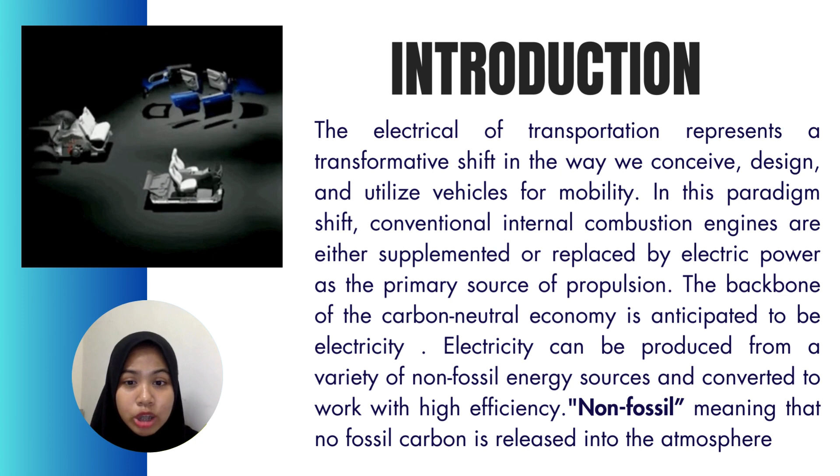The backbone of a carbon-neutral economy is expected to be electricity. It can be generated from a non-fossil energy source, contributing to sustainability by ensuring no fossil carbon is released to the atmosphere. Throughout this presentation, we will dive into the concept, advancement, and implication of electrical transportation.

It goes beyond just being a mode of transportation. It also signifies an innovative and sustainable approach to shaping the future of our mobility.

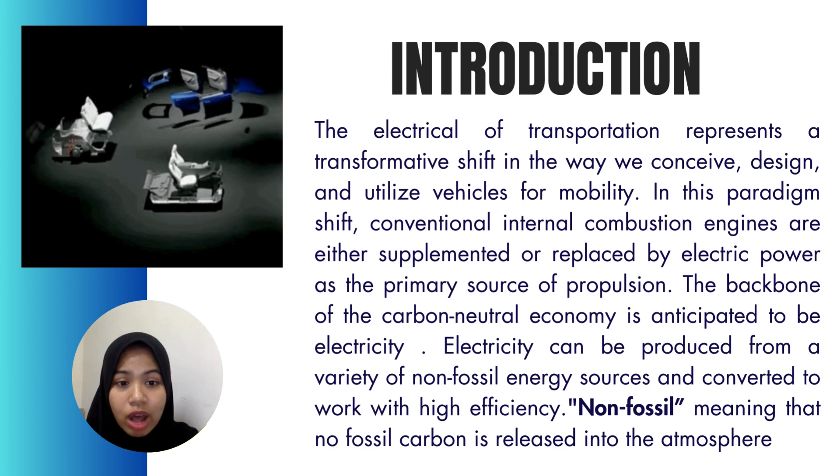Next, we will talk about the significance of electrical transportation. The first one is energy independence and security. It can reduce our dependence on limited fossil fuels by using electricity from a variety of sources, including renewable energy sources. By diversifying our energy source, it can reduce geopolitical risk and foster a more resilient and sustainable energy future that can improve energy security.

The second one is technological advancement. Advancement in charging infrastructure have made it easier for electrical vehicle owners to charge at home or at public charging stations, cancelling the need to head to the petrol station.

The last but not least, it's also good for urban planning and quality of life. In our urban environment, the significance of electric transportation becomes evident in the realm of urban planning and quality of life. Electric vehicles contribute to creating cleaner, quieter cities with reduced noise pollution and improved air quality because electric motors generate less vibration and noise. Sustainable and livable cities can be achieved through that.

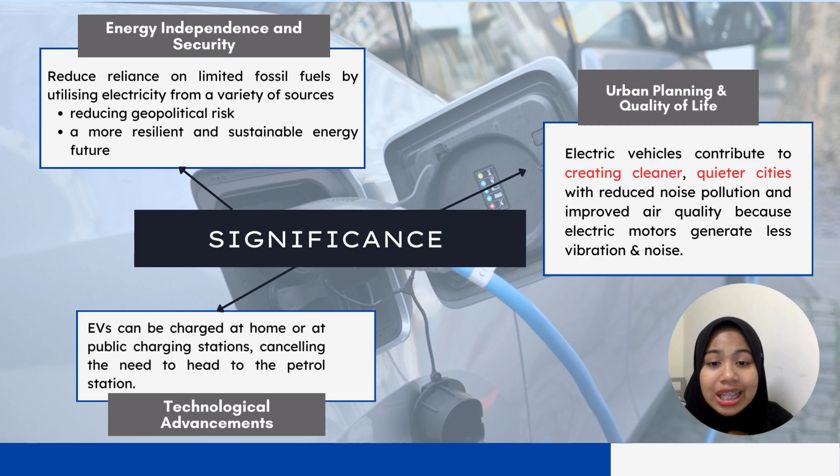Hi, my name is Nureen. So next is the potential benefit and challenges of electrical transportation. The benefit of electrical transportation is first, reduce greenhouse gas emission.

Electrical vehicles produce zero tailpipe emission, which can help reduce the overall carbon footprint of transportation and mitigate climate change. Second, is higher energy efficiency. Electrical vehicles are generally more energy efficient than internal combustion engine vehicles, as they convert a larger portion of the energy from their power source into forward motion.

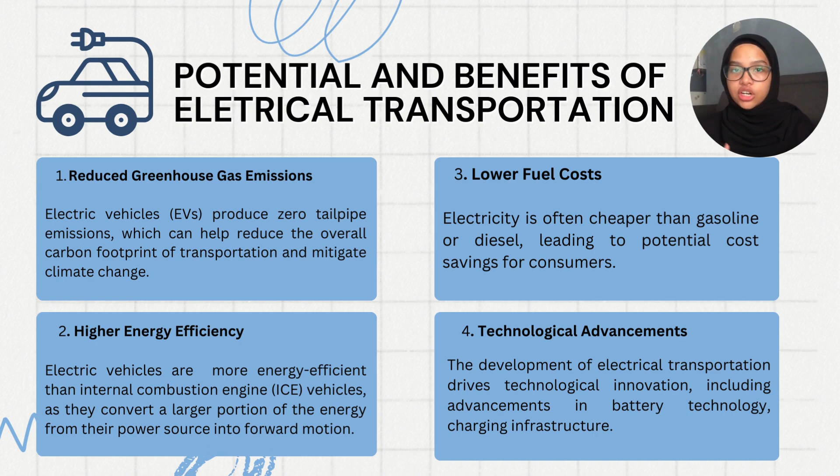Third, lower fuel costs. Electricity is often cheaper than gasoline or diesel, leading to potential cost saving for consumers. Fourth, technological advancements, which is the development of electrical transportation drives technological innovation, including advancements in battery technology, charging infrastructure, and smart grid technologies.

Next is the challenges of electrical transportation, or the disadvantages. First is the charging time. Charging an electric vehicle can take significantly longer than refueling a conventional vehicle with gasoline or diesel, which can be inconvenient for some users. Two is limited range and charging infrastructure.

Many electric vehicles have limited driving range compared to their gasoline counterparts, and the availability of charging infrastructure can be uneven, especially in rural areas. Next is initial cost. Electrical vehicles often have a higher upfront purchase cost compared to traditional vehicles, although this cost differential is decreasing as technology advances and economies of scale are realized.

Lastly is resource dependency on rare earth elements. Electrical vehicles rely on certain rare earth elements for their batteries, creating concerns about resource scarcity and geopolitical issues related to mining. Next is electricity and magnetism's concept behind the application.

Electricity and magnetism are two of the most fundamental forces in the universe. They are responsible for a wide variety of phenomena, from the workings of our bodies to the behavior of the stars. Electricity and magnetism are also essential for modern technology, powering everything from our homes and businesses to our cars and smartphones.

Electricity is a phenomenon connected to moving or stationary electric charges. Elementary particles are carriers of electric charge, which is a fundamental characteristic of matter. The electron, which is the particle involved in electricity, is known to carry a charge that is conventionally classified as negative. As a result, the motion or accumulation of a large number of electrons produces the various forms of electricity.

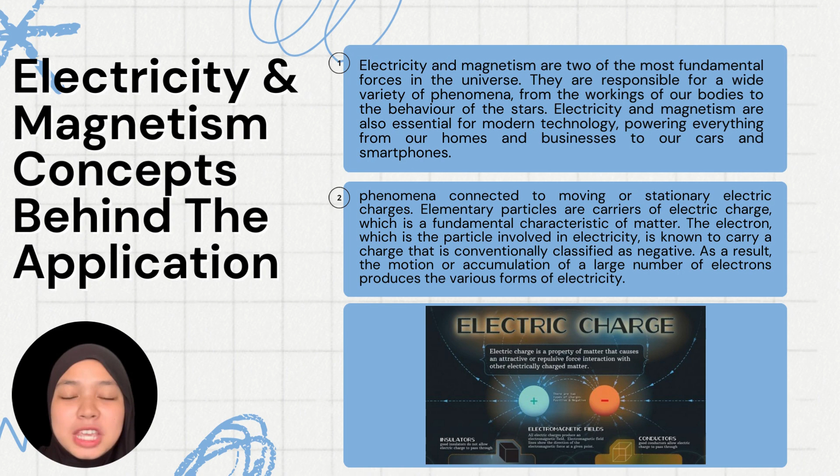The figure shows the electric charge, where the property of matter causes an attractive or repulsive force with other electrically charged matter. We move to the magnetism concepts. Magnetism is the force that attracts or repels magnetic materials. Magnetic materials are made up of small particles called atoms.

Atoms have a nucleus which comprises protons and neutrons, with electrons orbiting around it. Electrons have a negative charge and are constantly spinning, and this spinning creates a magnetic field.

Magnets are objects that exhibit a magnetic field, a region of space where magnetic forces are exerted. Magnets have two poles, a north pole and a south pole. Opposite poles attract while like poles repel.

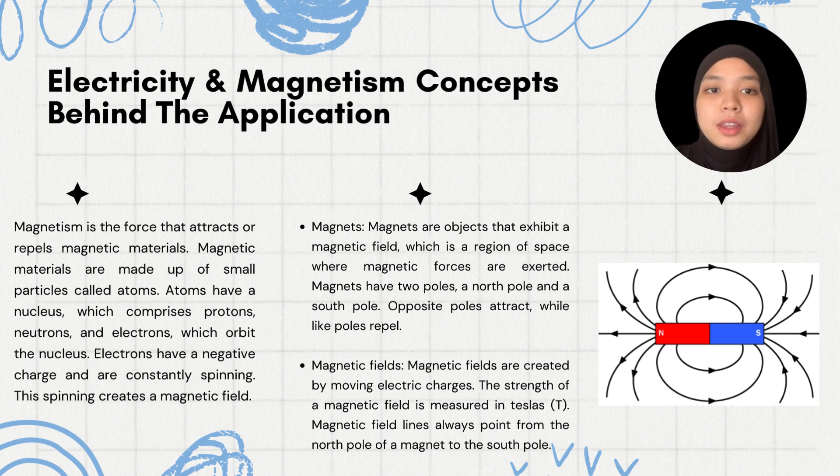Magnetic fields are created by moving electric charges. The strength of a magnetic field is measured in Tesla. Magnetic field lines always point from the north pole of a magnet to the south pole.

Now I will talk about the exploration of electrical transportation. In this video, I will explain more details about the maglev train and the concept behind its application.

Firstly, maglev trains use an electromagnetic concept, which includes electricity and magnetism. This technology does not require fossil fuel.

Secondly, electrical transportation refers to the principle of electromagnetic propulsion, based on the interaction between electric and magnetic fields. Electric current plays an important role, used to create an opposing magnetic field. When current flows through a conductor in a magnetic field, an electromagnetic force will push the conductor in a direction perpendicular to the conductor and magnetic field.

Maglev trains also use three concepts: electromagnetic suspension, electrodynamic suspension, and Inductrack. Here is further explanation about the three concepts behind the technology, starting with electromagnetic suspension.

This concept uses attractive force between magnets present on the train's sides and underside, and on the guideway, to levitate the train. In this system, the bottom of the train is surrounded by a steel guideway. Electromagnets attached to the train's undercarriage are directed upwards towards the guideway, lifting the train about 1 inch above it. During the journey, additional guidance magnets placed in the train's body keep it stable.

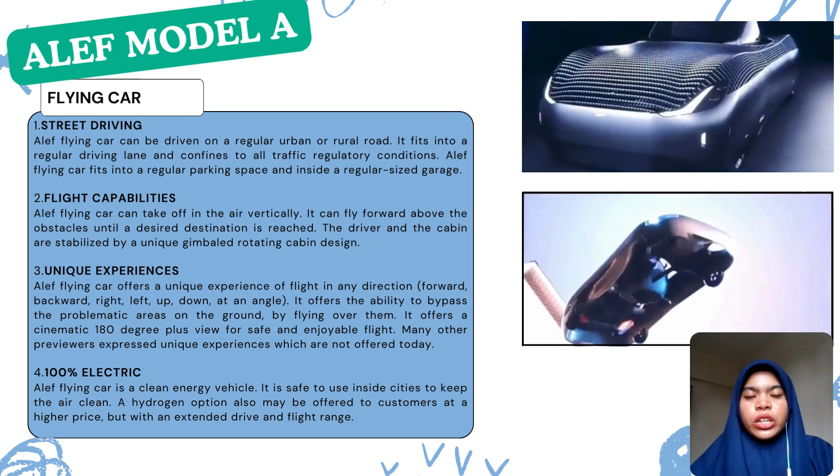The first interesting part about this flying car is street driving. Alef flying cars can be driven on a regular urban or rural road. It fits into a regular driving lane and conforms to all traffic regulatory conditions. Alef flying cars fit into regular parking spaces and inside a regular sized garage also.

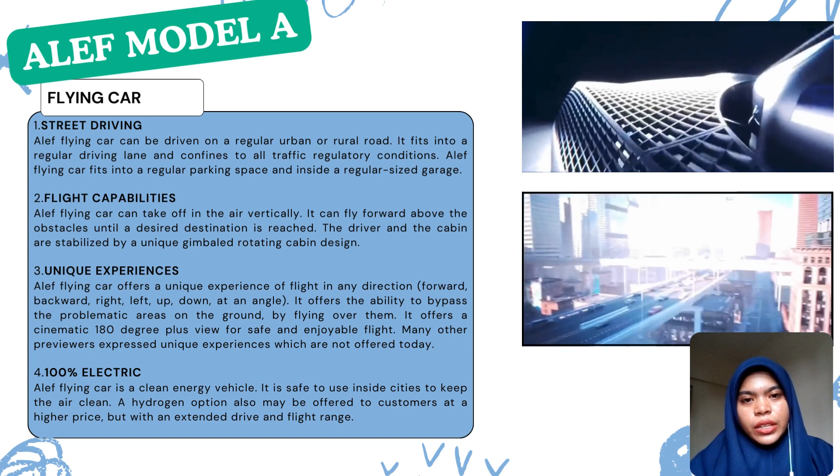The second part is flight capability. Alef flying cars can take off in the air vertically. They can fly forward above obstacles until a desired destination is reached. The driver and the cabin are stabilized by a unique gimbal rotating cabin design.

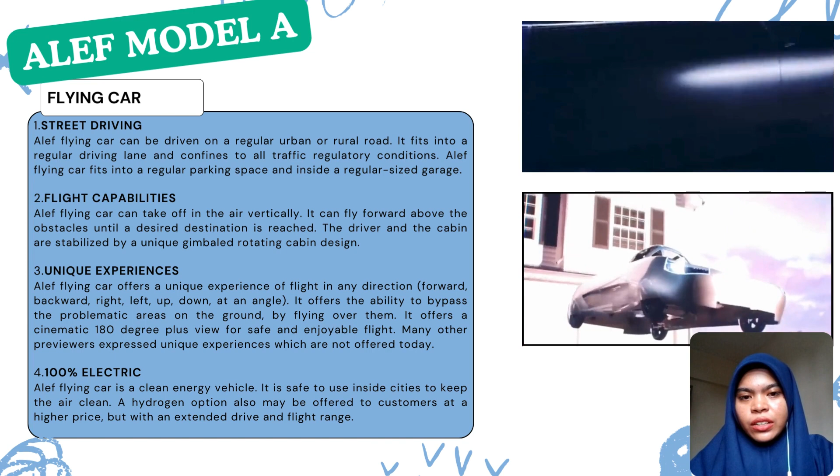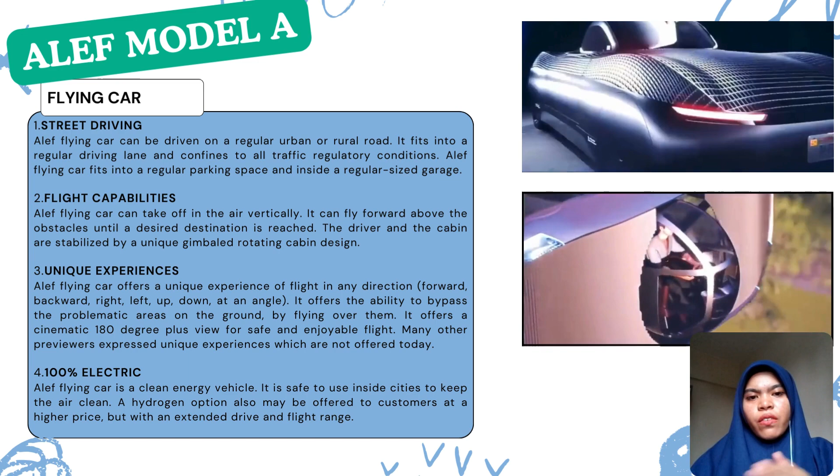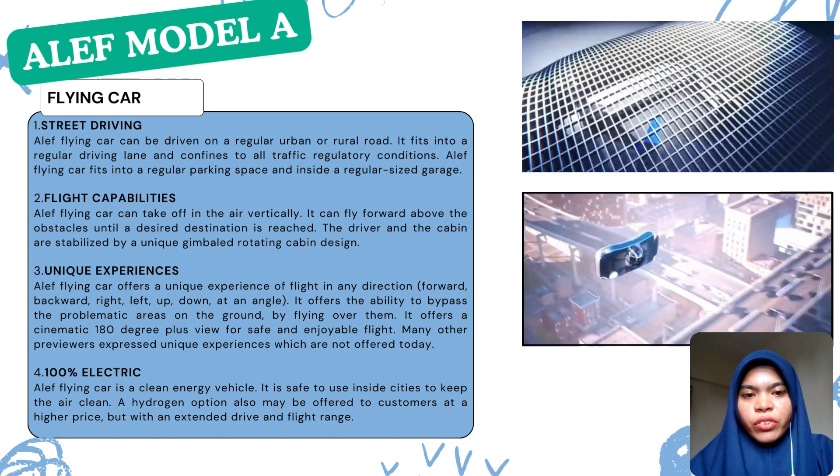The third interesting thing about this flying car is the unique experience. Alef flying cars offer a unique experience to fly in any direction - forward, backward, right, left, up, down, and at an angle. It offers the ability to bypass congested areas on the ground by flying over them. It offers a cinematic 180-degree plus view for safe and enjoyable flight. Many other previewers expressed a unique experience which are not offered today.

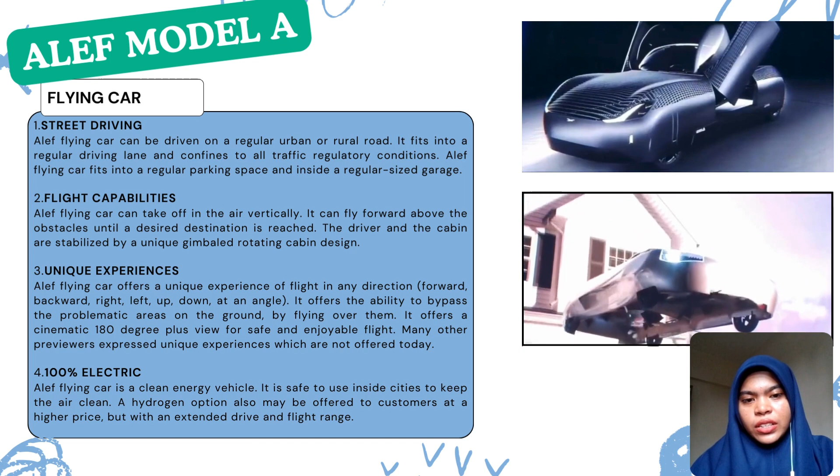And the last one is fully electric. Alef flying cars are a clean energy vehicle. It is safe to use inside the city to keep the air clean. The hydrogen option may also be offered to customers at a higher price, but with extended drive and flight range.

Okay, the last innovation that I will explain to you guys will be the Atlantis Level 5 semi-truck. This Atlantis is actually an electric semi-truck. This truck is designed by Russian designers Roman Dolzenko and Dmitry Voronezhev. These two Russian designers put their imagination to the test, imagining a future where semi-trucks are not only electric but also fully autonomous.

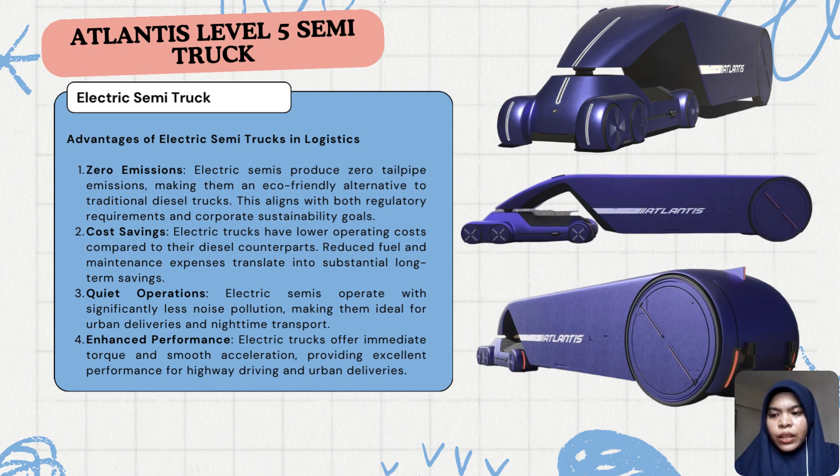The conclusion on electric transportation seems to be overwhelmingly positive. With advances in battery technology, electric vehicles have become more practical, offering longer range and faster charging times. This shift toward electrification is crucial in reducing greenhouse gas emissions and combating climate change.